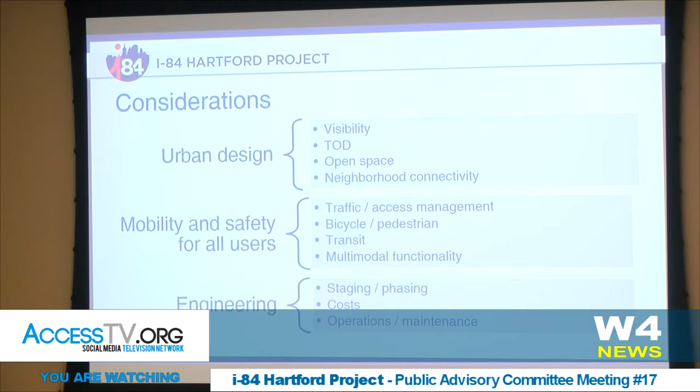So I'm going to invite the panel to come up now - David, Bill, Gina as well. Our panel is David Spillane coming up here from Goody Clancy, he's on the DOT team, our lead urban designer. Bill Kenworthy behind him from HOK is urban designer for the city of Hartford. And then Gina from Trans Systems is the lead transportation planner on the station effort. So David, do we have those mics? David, I'm going to let you explain some of the urban design considerations we've used to evaluate these stations.

So as we're thinking about the station, there were really 4 urban design considerations that we had. The first one really spoke to visibility, that the station was located in a place that was prominent, was visible from major public streets, that really emphasized its importance and significance as an important transportation facility, and had good access for the public. The second was the relationship between the station and transit-oriented development, which will be an important part of rebuilding the urban fabric in the project area that connects the 2 sides of the highway.

The third part really related to open space, and I think this is an important ingredient of what happens in this area, which we've talked relatively little about. It's one of the more likely uses for the land over the highway cap, which has significant constraints or cost implications in terms of building buildings on that cap. So that's a likely use of the capped area. And I think when we think about open space, we shouldn't think about it as being just like a passive park like Bushnell Park, but something that could be far more actively programmed with a variety of uses - maybe active recreation, ball courts, other kinds of things. So it could be a very different kind of open space that also draws people to this area and creates activity around the station.

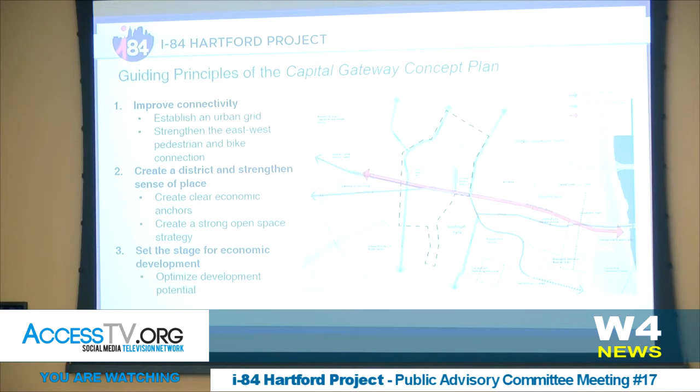We're looking at how you can not just walk, but also bike and use that to get around. We're looking at how you create a district. It's great to have the station and the infrastructure improvements, but how does that really start to grow into a district that connects Asylum Hill and the businesses up there to the downtown core?

Also, how do we leverage the open space that David talked about to really spur economic growth and development? It's great to have office buildings, residents, and apartments, but you really need a place for those people to get out and really interact with the city.

And finally, what this adds up to is helping set the stage for economic development. As I said, it's really taking the transportation investments and leveraging them for the city's benefit and economic development.

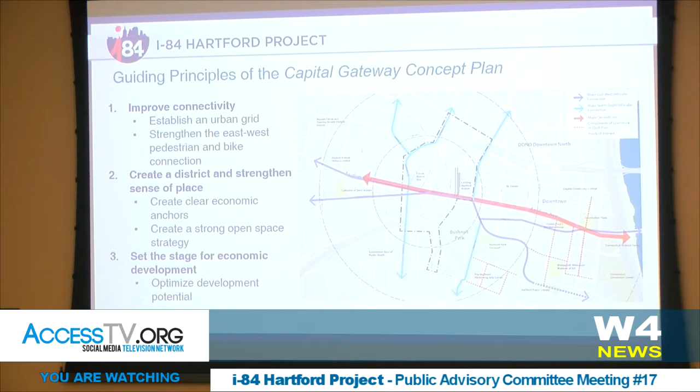Great, thanks John. So I'm just going to take a moment and orient folks to this map here, and I'm going to end up using some version of this as we advance through the different station concepts. So this is existing conditions.

Today the railroad comes underneath these I-84 ramps along Bushnell Park. Here's Union Station, just off Asylum, and then the rail continues to the north under I-84. Here are those two sections of I-84 where westbound goes under Asylum and eastbound goes over Asylum, and then the same thing at Broad Street. And here's Farmington coming into Asylum and Broad Street at the Trident intersection.

So I'm going to flip it forward to show you the lowered highway. The first thing you probably notice is both the highway and the rail shifting dramatically. The rail from Union Station, Bushnell Park, over to the west side of the highway, but also the highway itself, the lowered highway, being reconstructed a little bit, about 200 feet to the west of the existing alignment.

We've also included on this map that Garden Street extension we talked a lot about at the last meeting. Garden Street today comes down here, intersects Asylum at an angle. We're proposing to realign it, cross over the railroad and lowered highway, and intersect Spruce Street.

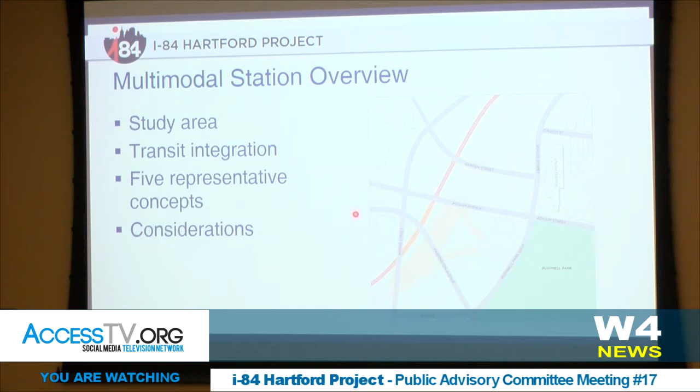We're also illustrating that Farmington extension concept we've discussed previously. I'll get into a little bit more detail on that in the next module, but it is something that we've now adopted as a team. The city's a strong proponent of it, and we're going to illustrate it in this manner on these drawings we're showing for the multimodal station.

You can also see this shaded area here, and that's intended to represent this cap we proposed between Broad Street and Asylum. That would cover both the highway as well as the railroad.

So again, when we talk about our station study area, we're really looking at either north of Asylum or south of Asylum, and that's really how we've grouped these station concepts. We also need to factor in transit and how the transit routes pass through this area.

The first thing I'm going to illustrate is CTfastrak, and again we're going to talk about that later, but generally we're envisioning it entering the corridor similar to how it does today, where it would come in from the west and then follow Bushnell Park West to Asylum Street.

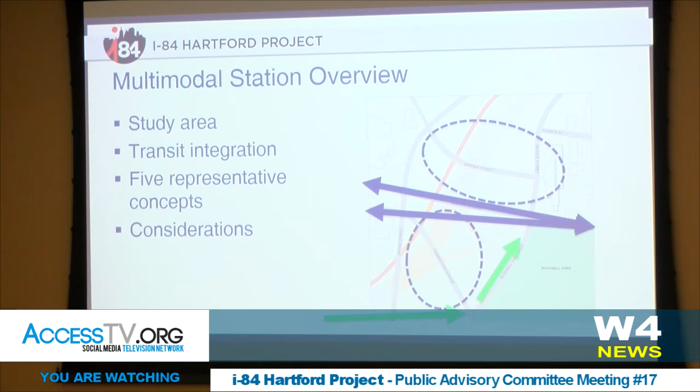There's also very high ridership on local bus routes from west to east, in particular on Farmington Avenue, but also up Asylum, and then there are other routes that go up to the northwest, as well as north-south along Broad Street. So we're going to go through 5 representative concepts, 2 south and 3 on the north, and I'm going to use the panel to touch on those different considerations we explained a couple slides ago.

So our first southern concept, Concept J, is actually one that was recommended by a PAC member and Bill McCarskey as well, who's in attendance today.

It would feature a rail station at the corner of Broad, the Farmington extension, and Asylum, a bus facility located essentially on the highway cap, parallel with Farmington extension, structured parking adjacent to Broad Street between Broad and that Farmington extension on a cap over the highway. And we're illustrating a kiss and ride or drop-off location, which would be accessed off of either Farmington Extension or potentially Broad Street.

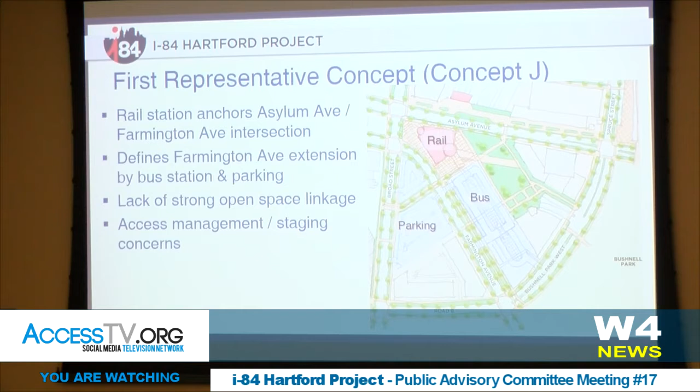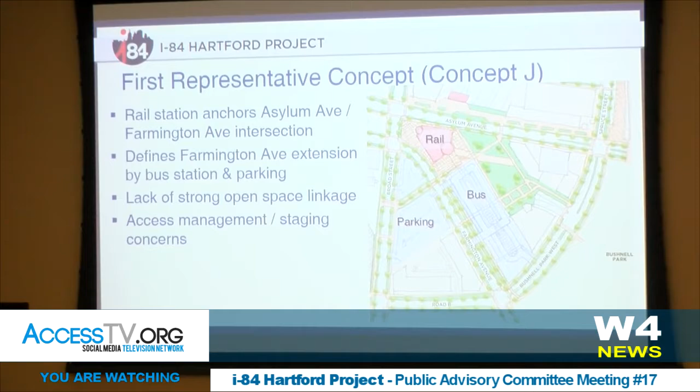Casey calls this the artistic rendering. What I call Casey's drawing is the X-ray, because it's just showing the infrastructure. I think the success of this ultimately is tied to creating a real place over the highway that connects the two sides, made up of the critical pieces of transit infrastructure—the station, the bus station, parking, kiss and ride, and all those other pieces—plus open space, plus urban fabric, buildings with people and activities. So the artistic rendering includes those pieces as well.

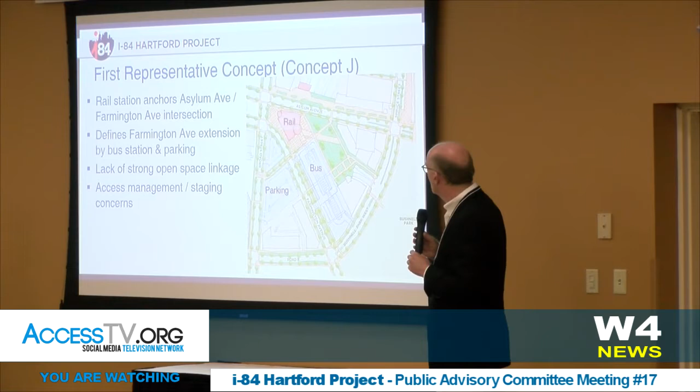So just a couple of observations on this, and I'm going to comment on some of this, and I think Bill's going to comment on pieces of this as well. So what you see here is, as Casey said, the rail station anchors the corner of Asylum and the Farmington extension, and that creates a pretty strong corner. I think it meets the criteria we talked about in terms of good visibility at a very important city intersection.

In terms of open space, in this one we're showing open space adjacent to the building. Probably not the best location for it, as it's not well connected to many of the things around it, so that might not get quite the level of use or activity we might hope for.

Asylum Avenue in this one, I think, works really nicely. What we've got on the north side are new buildings. The station becomes an important part of the street, and all of the kiss and ride and other access functions are really pulled off onto some of the other streets. So Asylum works pretty well.

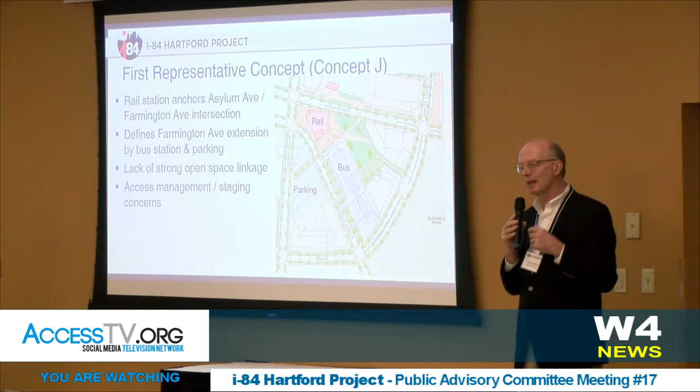Concerns from me on this one, from an urban design perspective, would be that Farmington Avenue extension, because what we get on that street is a street that at the corner with Asylum has the rail station, but then you've got the bus station behind that, and we've got parking on the other side of the street. So on the Farmington extension, where I think the vision and ambition is that it's a gracious street that extends the Farmington corridor into the heart of downtown, I think a lot of the things in this option that are on that street are really sort of support infrastructure. If you can imagine Spruce today, a lot of those activities in this version are coming onto Farmington.

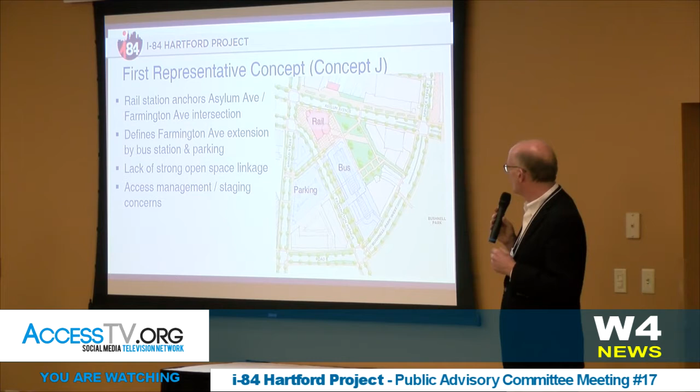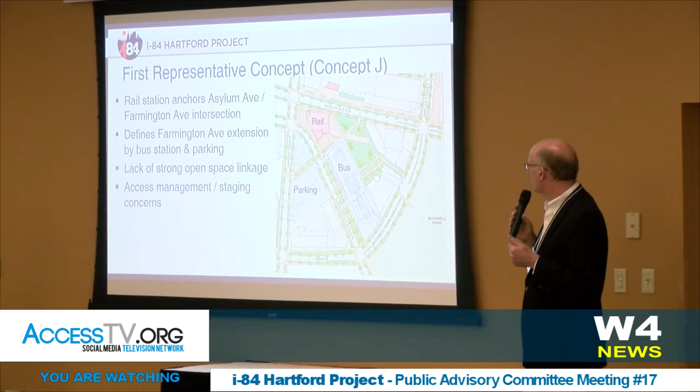In a similar way, I think that Broad, which is such an important connection across the corridor, becomes a street that's really defined by largely a parking structure, kiss and ride, and other things. So ultimately what we get here is not a great street on Broad, not a great street on Farmington. Asylum works really well.

Thanks, David. Gina, can you tell us a little bit how you see this working from a transit perspective?

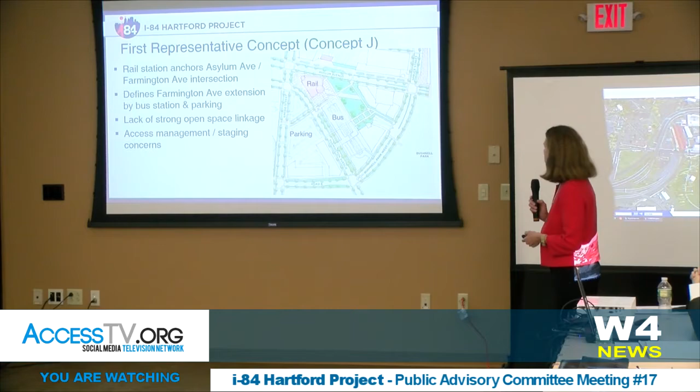From a transit perspective, this would actually work well because in some parts the rail and bus are in proximity to each other. You would just be crossing at grade to get from one facility to the other, with bus passengers also using the rail station for waiting area, vendor space, and crossing to the parking lot, also done at grade.

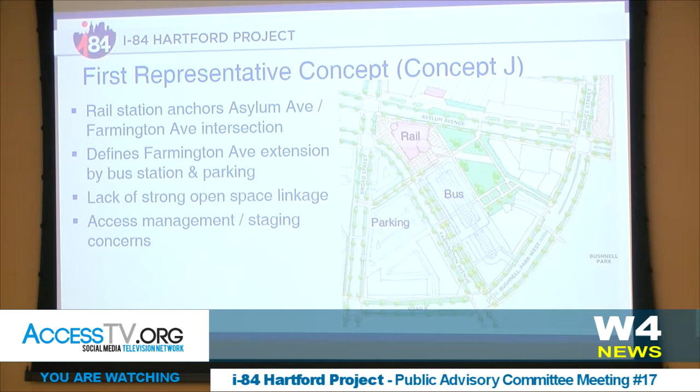To get on the north side of Asylum, which you may want to do to catch a local bus on the north side of the street, we could possibly build a concourse level below the at-grade level to make some connections. From a passenger loading perspective, the two south options have some drawbacks because the station is on the south end of the platform, meaning passengers would be loading on one end rather than distributing among the platform.

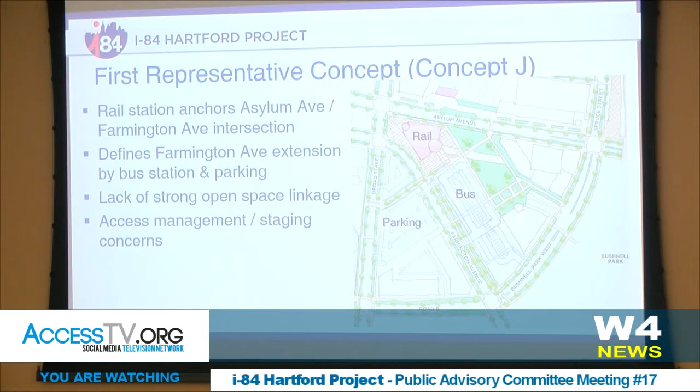Thank you, Gina. And Bill, from your perspective, what are you seeing with Concept J?

From an economic development standpoint, we began looking at some of the key sites on Spruce and Asylum, down lower on the south side of Asylum, and Bushnell Park West, and one down here on Road B. An opportunity here really isn't an opportunity in this plan because of the location of the bus infrastructure, so those are some things to consider. The great addresses could be on Spruce and Bushnell Park West, facing the park, in terms of how we get active frontages on those streets and the surrounding open spaces. We'll touch on those criteria as we walk through each version.

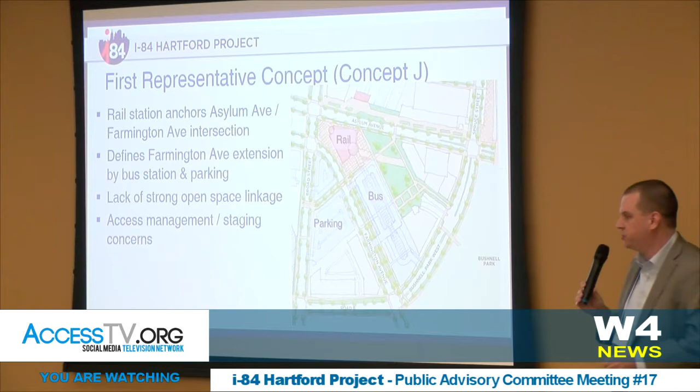The last concern we see with locating these facilities south of Asylum is that access for both parking and buses is off one of the major streets—it would have to be off Broad, Farmington, or even Asylum—and that's something we'd like to avoid.

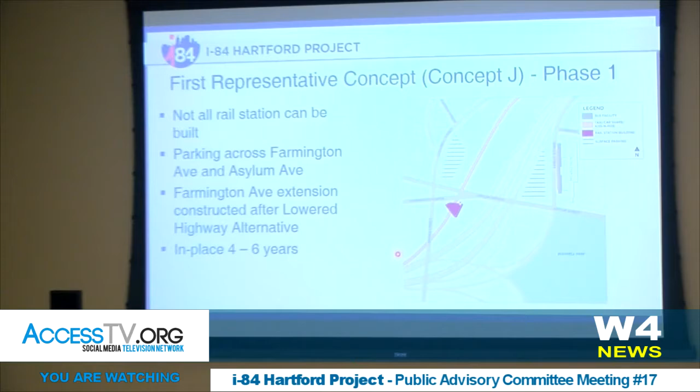There are also some staging or phasing concerns. Let me bring up a map to illustrate. This is what we're calling phase one, where we've relocated the railroad but the existing highway network and ramps are still in the same locations. Ultimately, the Farmington extension can't be built all the way to the end of the project after we've already lowered the highway, so we'd be in a condition where we'd need a temporary station, and it'd be really difficult to provide any parking for it.

I know that's probably an unpopular take, but we do need to provide some parking. The only opportunity we see is to use this lot currently owned by the Hartford, which we'd need to acquire to construct the railroad, and use it to provide temporary parking—temporary really meaning 4 to 6 years.

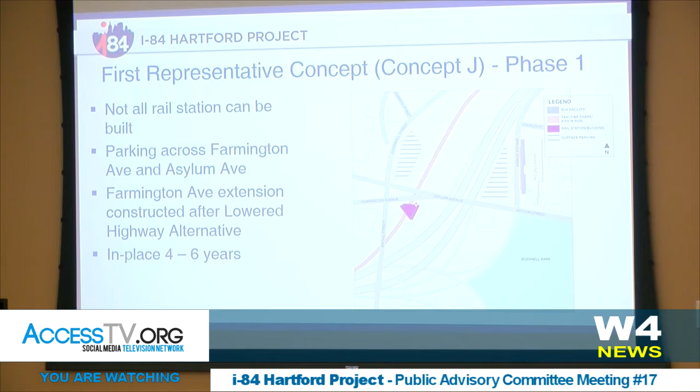So this is a downside to the southern option, how it would function in this first interim phase, and the same applies to our second southern concept, Concept K. Here the rail station stays in the same location between Farmington Extension, Asylum, and Broad. The bus facility and a parking structure would be combined in one building along Broad, mostly on a cap over the highway. We have a couple ideas for where a kiss and ride or drop-off could go—one is as illustrated here, and on the next rendering you'll see it could also be here.

So I'm going to start with Bill on this one. Bill, do you want to talk about some of the urban design and development aspects?

Sure. So on this one, the rail station is obviously still to the south, and the kiss and ride is here on Farmington. In this concept, we've relocated the bus parking along Broad Street, which allows the center of this block to be opened up for open space with development surrounding it, as I mentioned in the previous slide.

Some of the considerations here are the relationship of bus parking against Broad Street and Frog Hollow, which is a kind of drawback to this particular scheme. But what this really does is begin to open up the center of the plan and allow more of the amenity spaces associated with the buildings to become part of the experience with the open space as well.

Thanks, Bill. Gina: for this concept, the rail and bus are a little bit too far apart to allow the rail station to function as the bus station also. So in this case, you'd almost need to build a separate bus waiting area just north of the bus parking, or even south of it. From that perspective, it's not as ideal as the previous concept.

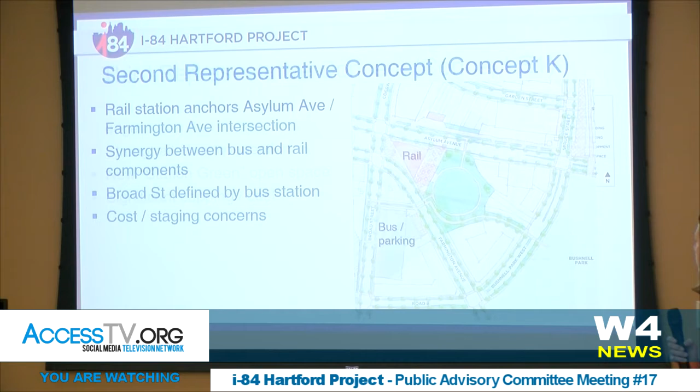So now I'm going to move to a northern concept, concept E1. We're going to show basically 3 different versions of concept E, and the differences are really in where we locate the bus and the parking facilities.

The rail station is on the north side of Asylum, constructed over the tracks between Asylum and Garden, and we envision it would have a facade on both streets. In particular we would pay attention to that Asylum facade in terms of pedestrian access.

The bus and parking facility would be located on a cap north of Garden Street. This is a change from other concepts and previously illustrated cap options, where we're now having a cap that extends well to the north of Garden Street.

We've illustrated a kiss and ride here on this drawing. It could also be a little bit more linear along Garden Street, but generally speaking, we're thinking it would be accessed from Garden Street.

So I'm going to start with David on this one, if you want to touch on some of the urban design aspects here. So, you know, this one, we have the rail station here on Asylum, coming out to the edge of the street.

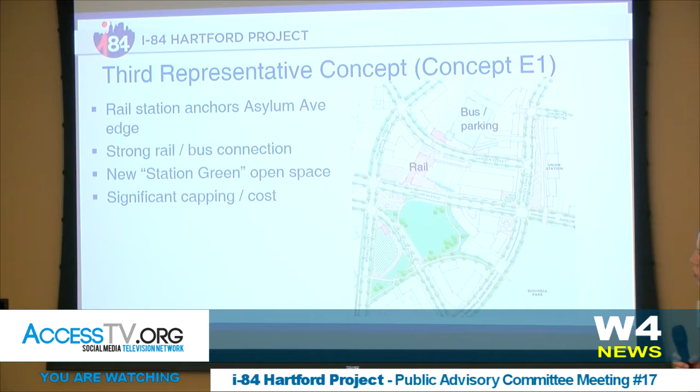And I think that we've studied views up and down Asylum, and if you go right back up Asylum, a building that came out to the edge of the street, if the building beside it was slightly set back, really could terminate a long vista along Asylum, just as the Congregational Church does at the other end.

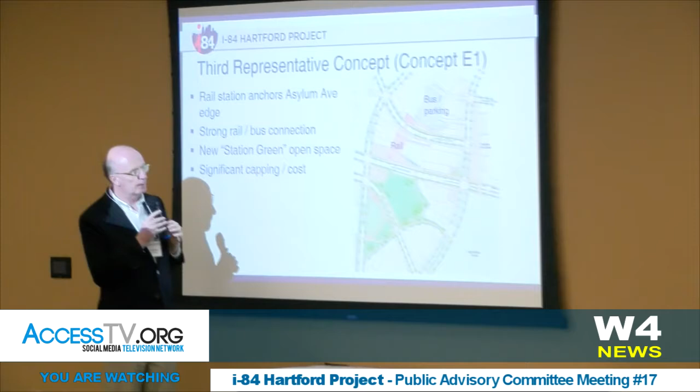So in terms of visibility, I think we've got some strong visibility here. In this case, Asylum and Farmington are really terminating in an open space, which, as I said, might not be an open space like Bushnell Park.

It could accommodate active recreation. It could even potentially have some lower buildings, pavilions that activated the park. But this, in effect, becomes the station square as a space that's shared between commuters, surrounding neighborhoods, and the corporate communities that are here, and becomes a gateway from the downtown to the neighborhoods and vice versa.

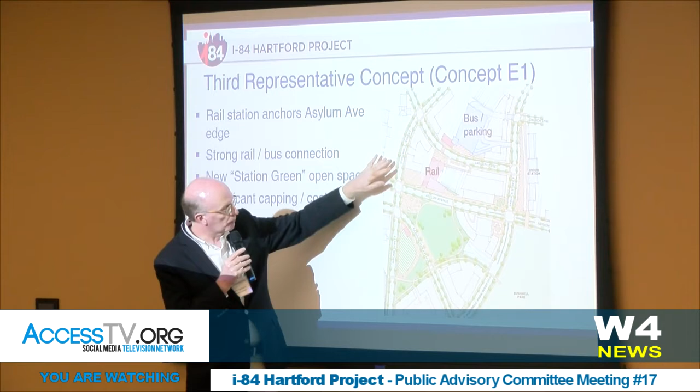Looking at the streets, I think one of the things we get is a nice transition along Cogswell to Broad, which is really a connection along the edge of a park. Farmington, again, connects through a park space as a gracious street, as is Asylum.

In this case, most of the functions for the bus and rail station drop-off pickup are on Garden, but just because of the configuration of the street, we're able to include them in a more compact way than we were on this much longer Farmington connection. So in this case, I think there's a pretty good relationship between development and open space and the train station in ways that each reinforces the other.

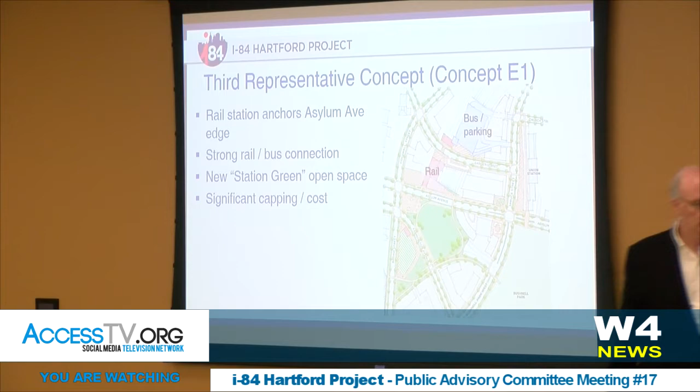Thanks, David. Gina, do you want to touch on the transit? From my perspective, E1 really works well from a multimodal connectivity practice. Rail and bus are relatively in close proximity.

You could either cross at grade on Garden, or you could possibly build a concourse level. Again, the platform level is lower level. You could have a concourse in between the at-grade and the platform level to have some connections on that concourse level between the bus and the parking.

The drawback here, though, is it does require a cap. The cap is very costly, and we also don't have a really good read on whether there are security or safety concerns building over a highway. So those are considerations we are still thinking about, but the cost implications render this one maybe not as feasible as we would like.

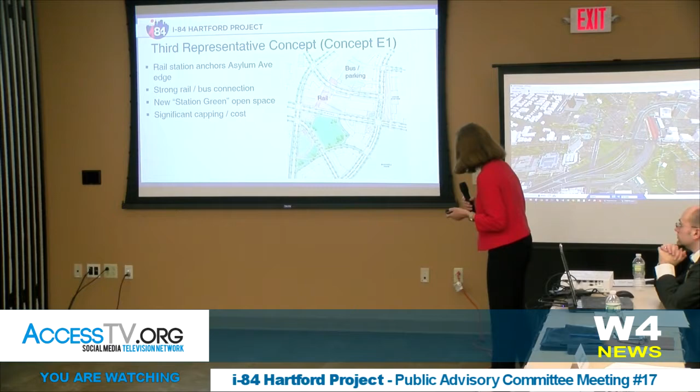In terms of the phasing, we actually see the northern functioning a little bit better during phase 1, where the rail station would fit in nicely with where we are able to provide that parking access, further up off Cogswell Street, taking some of the burden off the Trident area. So we do see that working better.

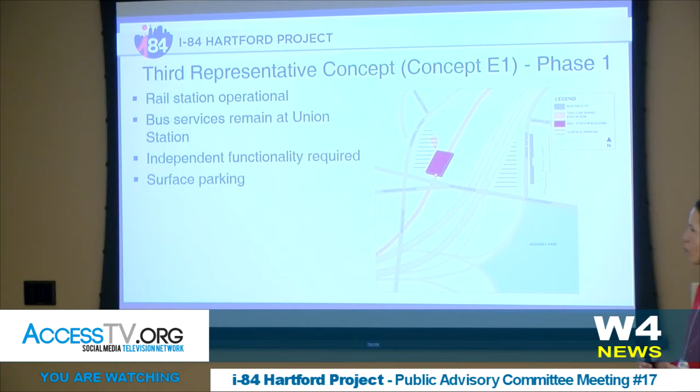And just to confirm for everybody, the bus activity would likely remain at Union Station until the bus facility would be constructed, which for each of these concepts ends up being late in the construction process.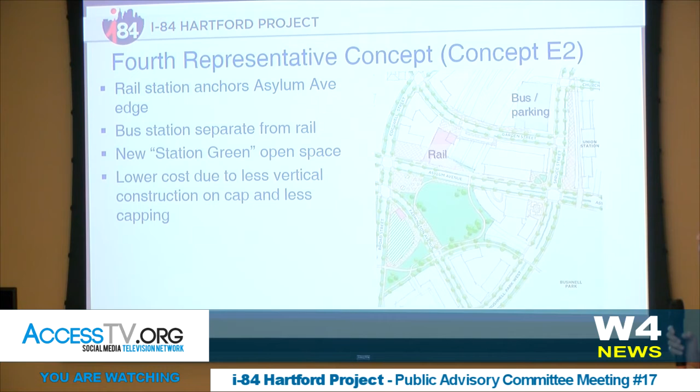Well, in this concept, the bus is really acting similar to what it would be doing now in terms of being very proximate to Union Station. However, from best practices or what we've heard from the public, we really feel that the bus and rail should be pulled as close together as possible. So for this concept, it would not really support that multimodal functionality.

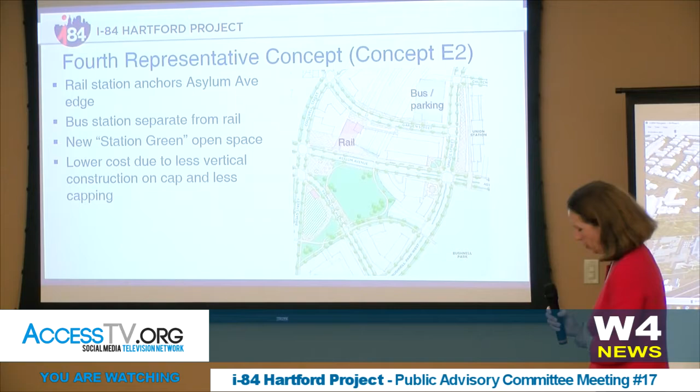Thanks. Bill, do you want to? Sure. So the big difference for the economic development in the streetscape is you're obviously taking what was a developable frontage across from what the repurposed Union Station could be, and relocating the bus station to that area. Now, that doesn't mean there couldn't be active things happening near the ground floor to keep that experience of a higher quality, but it's just something to consider in terms of what's fronting on what the repurposed Union Station might be going forward in the future.

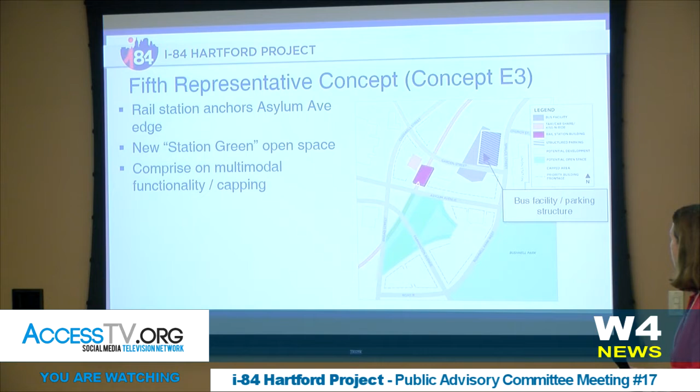Thanks, Bill. So ultimately, what we then tried to do is take those two concept E's and try to balance the cost implications, the need for capping, and also try to create a little bit better multimodal functionality. So the way we did that was we took our E2, which has the bus facility located in this parcel next to Spruce and Garden, but we've now shifted the bus closer to the rail station by bringing it underneath Garden Street. So this is below Garden Street, essentially constructed where that parking lot is today for Union Station. We would excavate a little bit down to allow Garden Street to come over. And again, the same general concept for the kiss and ride.

Gina, do you want to talk a little bit about how this actually affects multimodal? This is a pretty good compromise, especially if there is a cap, which will be shown in the next slide, between Asylum and Garden, and we can talk about that in a little bit. But this at least brings the bus and the rail closer together. It lowers the bus facility to below grade, but yet has access off of Spruce Street because of the hills and the grade. So the buses can operate pretty efficiently coming in and out of the bus facility, as well as the parking vehicles for the parking lot.

It does provide connectivity between the rail and bus that we could actually have as climate controlled. You see that blue, that would be representing some type of pedestrian walkway between the bus and the rail. And you could bring passengers from the rail to the bus facility through an underground tunnel possibly, or some type of concourse also. So there would be some connectivity.

Thanks, Gina. David, do you want to touch on some of your thoughts? Yeah, I think this one is really very similar to the one that Bill previously described. I think the real difference is only the ability to get passengers between the bus and rail functions internally, without going out on the streets. That's the primary difference. From an urban design perspective, I think they are essentially the same.

Thanks, David. So I'm going to advance one more, and Gina had referenced this idea of potentially capping this area between Garden and Asylum, and it is something the city's expressed a real interest in. So I'll let Bill give his thoughts here on this image.

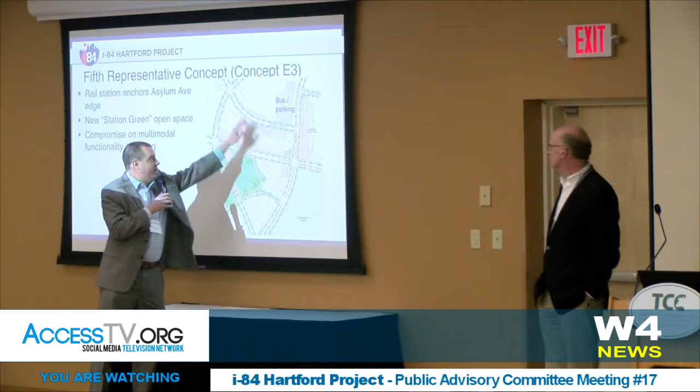Sure, and the concern and consideration is the relationship of this open space to the new train station, as well as the development that sits across from it, and the experience walking down Garden Street, and making sure that whatever happens in here doesn't feel like it's a hole in the ground with a lot of noise coming out of it. So the goal here would be not necessarily in an intensively planted way, but maybe there's a way to get a structure that can still be active.

I'm still concerned about the size, and I think David shares my concern about the size of this space. This is about an acre worth of space over the highway, 200 by 200. But to create an opportunity to be a new open space heart in what could be a new commercial district related to the rail station, and to provide mitigation against what otherwise would be an opening down into the highway for the purposes of development happening north of Asylum.

Thanks, Bill. So ultimately, I think the conclusion here is based on a lot of those different factors we explained that generally favored the northern sites. We've then worked to create this concept E3 that we feel best represents a compromise in terms of potential construction costs versus multimodal functionality, and we're here today to recommend this concept. So to wrap that up, we feel that E3 best satisfies the criteria, has all those advantages shared with the northern concepts, and has that balance.

We're hoping that the next steps from here would be to advance the design of that station to what we call about a 15% architectural level, which we'd wrap up right about when the EIS process concludes. So we did want to pause for Q&A here. If one of you guys could be a runner for the microphone if we need one.

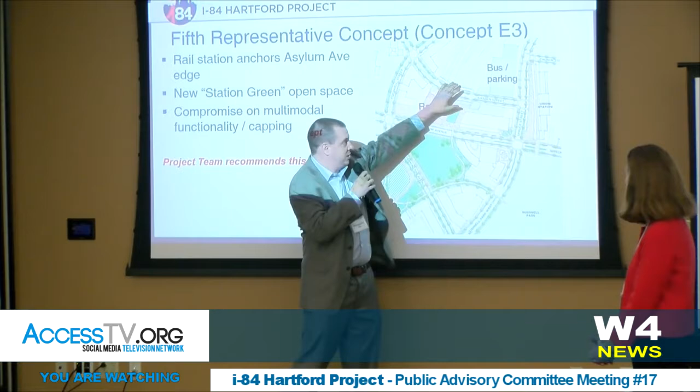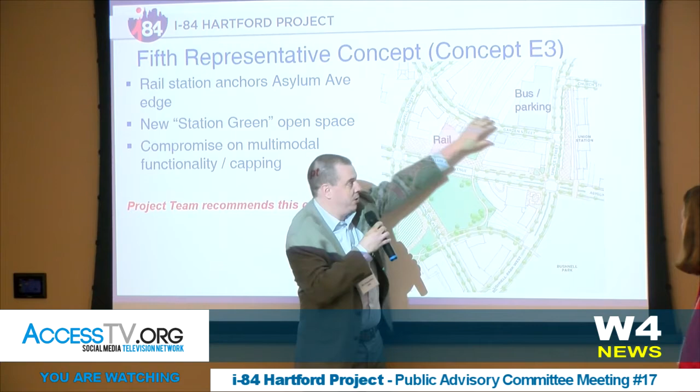I think the hope of Garden Street is that it's an important pedestrian connection from Asylum Hill down through the new district we're creating to the repurposed Union Station. And the idea is that it's a pedestrian bike street that happens to have vehicular access into the station, and that this is going to look and feel like a city street. There are some frontages that are a little tougher with the bus station. And the idea would be we would try to activate those frontages to the degree we can at the ground floors, which is the most critical part, to make sure that you have as seamless an experience as you can coming down through here, that's the goal.

And to Tony's point about open space, I'm the biggest advocate in the room for making sure we manage, control and have properly scaled open space. So there's certainly some concerns about being able to fit a Bryant Park-sized facility within this green space, and I don't know that it has to be as green as we're showing either. I think it's about creating a great program that's seasonal, that allows it to be active a lot of the year. I don't want to create another Bushnell Park because you've got a great Metropolitan Park right on the other side of this development. This open space wants to be a different kind of setting, more courtyard-like, maybe harder paved than green. Not that you can't have trees, but the idea is it's got more different types of uses happening, helping it be an active space year-round, 12 months of the year.

Yeah, I completely agree with that. And I think in terms of open space, where we would be is at the beginning of the conversation about how to really make that something valuable. I think Providence went through a similar process with similar circumstances when they created WaterPlace Park, as part of a major new development as they moved rivers and highways, adjacent to large areas of open space and parkland around the state capitol building as well. So I think it will take a lot of work going forward to fully define that.

I think there are possibly interesting connections from the YMCA there in terms of programs. I think it's a place we could think about playgrounds, bowl courts, all kinds of other things that really made this a valuable community space, used very differently from Bushnell Park, but it will require significantly more attention going forward. I think there are really great opportunities there.

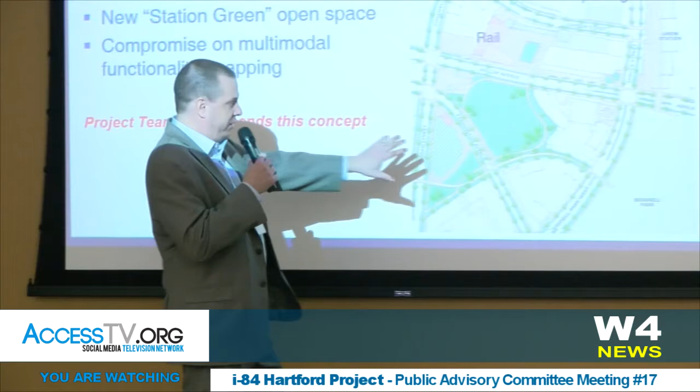There's one more important point about the size of that open space. A lot of it's dictated by the highway infrastructure or train infrastructure that sits underneath. It's very difficult to build buildings on top of. So in designing this, we need to think about the right things to do to make that space more manageable in terms of size, scale, and character. But it's better than having a hole down into the highway, which would be the alternative, because otherwise you're going to build something like heaven over I-84, basically a building site that never happened, which would be the end result otherwise. So we need to make sure we get that right and program it correctly for the long term. Aaron had his hand up first.

Well, Bill just took my first thought. I would definitely agree. I think it's been generally accepted in the room that private development is not going to occur over the highway because of the additional cost of the increase in size and the cap itself. So I strongly agree it would be much better to have green space capped on top of the highway and hide the impact through this stretch than anything else. Most in this room know that's what I've been pushing for from day one on this project. So that being said, I am encouraged, as I've said many times, to see the cap along this section and to see the green space there.

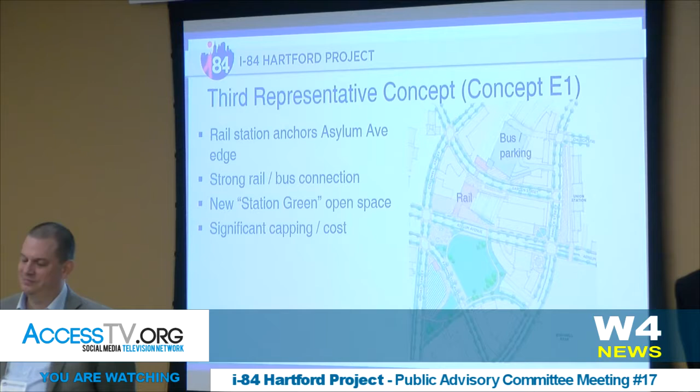Along those lines, knowing we're not going to get private development on top of the structure, I would strongly encourage reconsideration of concept E1. One of the main goals of this project has been explained to me as reducing traffic congestion through this area. One of the most cost-effective ways to reduce vehicle congestion on highways is to get people into public transportation. And it was pointed out the best way to get people using public transportation is to make it easy and convenient. Separating the bus and the rail - on this drawing it doesn't seem like a long distance, but I know many will use that as an excuse - whereas E1 really pulls together the bus and the rail use. Many in my neighborhood will use the bus as the beginning and end of their commute, taking the bus to the train station and the train to work, then doing the opposite. So I would encourage reconsidering the concept of E1, recognizing there are other cost benefits to putting those structures together.

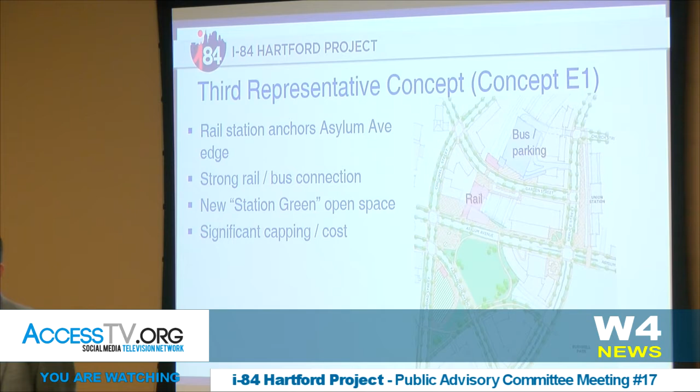I also am discouraged about E3 by the fact that we're eating up yet another prime piece of real estate in the heart of downtown with the use of a parking garage, whereas a parking garage over the highway is a great use of that space that would otherwise be wasted.

Thanks, Aaron. I just wanted to confirm one thing on the bus access to the station.

So while we label this as the bus facility, that's really primarily an intercity bus facility, your Greyhounds, your Peter Pans. I'll talk more about CTfastrak later, but we envision that local bus routes on Farmington and Asylum, and potentially CTfastrak routes, would still have stops right in the vicinity of the train station. So if you were taking a local bus to the train station, it wouldn't necessarily take you to this bus facility.

I kind of agree with Aaron as far as E1 is concerned. And I like the idea of the green space. I think Bill McCarskey, from even before this project began, has talked about the view from the little girl and the hands across to the state capitol. This green space makes sure that nothing obstructive is going to be there.

If you do E3, could you talk more about the tunnel? Because I would be fearful that it would turn out to be a narrow, scary, unattractive, hard to keep clean space. What do you think you might do to make it beautiful, appealing, and comfortable to walk through?

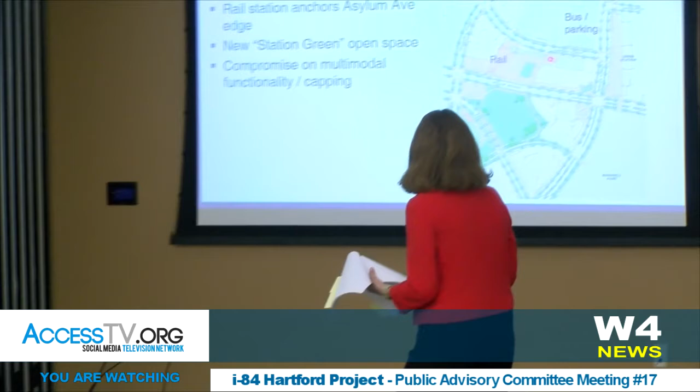So I think you're referring to this potential passageway underneath Garden Street, between the rail and the bus. Oh, so that would not be a tunnel. Yeah, that would not be a tunnel, what we're showing there. I had mentioned there could be a concourse connection, a tunnel type connection also below the at-grade. What we're showing there is an at-grade crossing, just climate controlled. It could be part of a building, it could be part of a glass enclosed structure, or actually just a walkway with a covering. We just want some type of climate controlled facility connecting the rail and the bus.

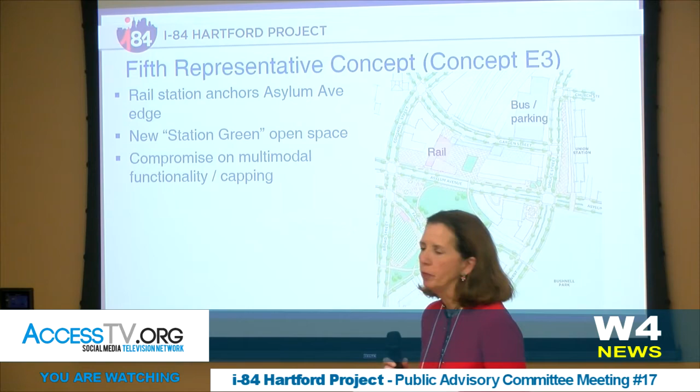There are also other options to connect if you wanted to go below grade and make a connection there, but I understand your concerns with having something that's not secure. And to the issues you raised, it's a walk uphill from that bus station. So in January you want a place with climate control, but Garden should still be a great street, so in the summertime you can walk up and down the hill.

Thank you for your patience, it always takes me a while to get these. Can you explain a little more about which buses are going to be at the bus facility? And is Spruce Street going to be widened? And where are the city buses going to be?

The only routes pulling into the facility would be the same routes that pull into Union Station today. There are 5 local bus routes that end at Union Station, and those are the 5 we're assuming would pull into the new facility. The bus routes that continue on Asylum and Farmington would still be routed the same way, so you would make connections on the street. If they go down Spruce Street now, they would again. Correct. Any buses that don't currently pull into Union Station, I have those numbers and can share them with you afterwards.

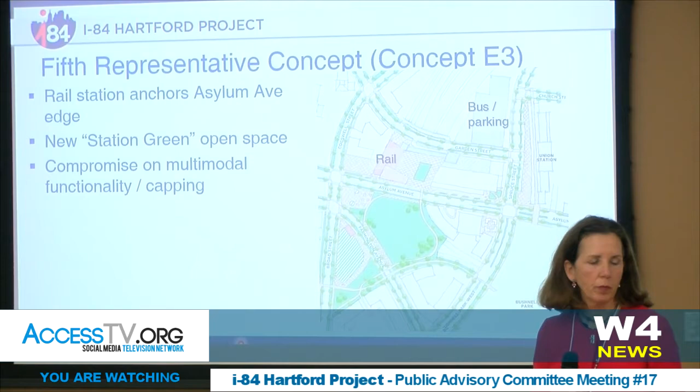But is Spruce Street going to be widened? I'm not aware of Spruce Street being widened, I'd have to check. We did consider whether there might be a need for a turn lane to serve Garden Street, but I don't know if that's fully resolved. Just remember, there are no lane lines on these diagrams. There's more engineering that goes into the intersection design. This is really just a conceptual view of the overall area. We have other drawings with more detail for some of the lanes.

Okay, because I was just, there are sometimes a lot of buses at the same time in the same place. Last week, between Union and as far up the hill, I could see there were 17 buses. A lot of those are probably intercity buses. There's Intercity, Peter Pan, CTfastrak, and the week before that I was on Spruce Street making the turn onto Church Street with 6 buses. So they take up a lot of room and they really don't make it easy.

Well, the intercity buses would definitely be pulling into the facility, and the 5 local buses would be pulling into the facility too, so they wouldn't be staged on Spruce Street as you see them now—they're on Union now. Right, so they'd be pulling in off the street into the facility. Would that be the end of the route, or would they still go downtown? If they end at Union Station now and turn around, then they would; if not, they'd continue their normal routing, but pull into the station to keep going. Only the 5 that currently do now.

Is that the ones on Union Place? Correct, yeah, so I can give you those numbers. Those buses go downtown, then terminate at Union Station—perfect buses to come into this bus facility, because they're already taking their layover at Union Station. Those are the only ones we're talking about that would pull in. When they start their return trip, they hit downtown, then go out together, whatever their schedule is. The transit operations will be relooked at once this facility is being designed.

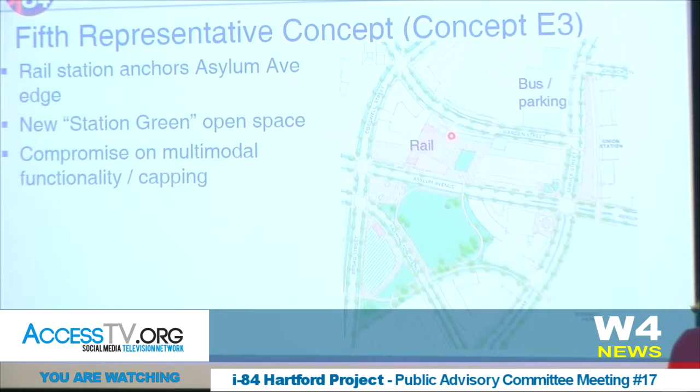I just remembered my other question, about the connection between the rail and the bus. If it's going to be an uphill grade, is that okay for wheelchair or handicap access? It would be relatively flat, about 3%. Garden Street isn't that steep—it doesn't really start to descend more steeply until after it crosses over the highway, so this part isn't actually as steep.

There are examples of how to create active frontages, office spaces, retail at the ground floor of garage structures, so I would think that's possible. I think it has to be worked through with the team going forward to make sure when the location is set that we have that as a performance criteria.

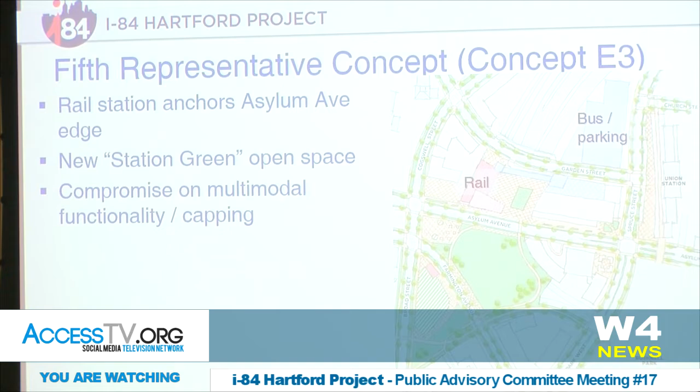So we've got some last questions. What's going to be on Garden Street to make it pedestrian friendly? We have not identified the full range of bicyclist and pedestrian accommodations. I would imagine it would include widened sidewalks, potentially bike lanes, and some street furniture, whether that's street trees or other types of amenities.

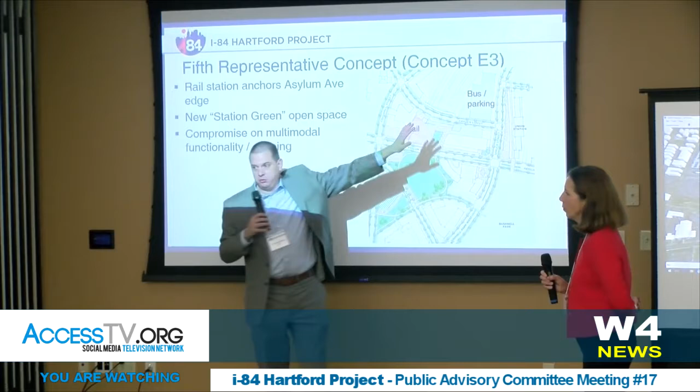The hope is that development sites fronting on it would have active frontage as well, so this isn't a back street—we want it to be a city street, as complete a street as we can make for that access point coming down Asylum Hill to the new repurposed Union Station. It's a very important front door for Union Station from this side, the way it's considered now. Yes, exactly.

So I think what I heard was a couple folks mentioned E1. Maybe what we can propose is to advance these two northern concepts, and get back to you on what exactly that cost difference is. We're still finalizing those cost estimates, but we think it could end up being a big number, which shapes part of our thinking in recommending E3. But I didn't really hear any opposition to moving forward with a northern concept.

I just had one last one—I just stole the microphone. I wanted to second the concept E1 and getting that bus and parking over the cap. I see that as good use of the cap and a better use of developable land that we could keep free. Thanks, Tony—so we'll pull forward both of those two concepts and get back to you on some of the cost differences.

Is the cap next to the rail in E3 included? As I heard you say, it would be a great spot for a cap next to the rail, with the green rectangle in it. Is that part of E3, or just a possibility? I would say it's a possibility being strongly recommended by the city, as we conduct cost estimates for the two different scenarios, and I think it will have to be part of the conversation moving forward.

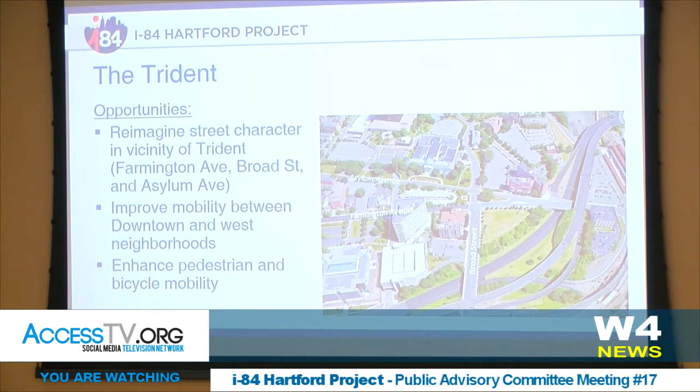As you all know, today it does not operate well, and with the potential changes in travel patterns - today one of the big drivers for travel patterns in the Trident is access, particularly in the PM, to this eastbound on-ramp that comes from Broad Street. Ultimately, in the lowered highway alternative, that would be moved to that new road off the page here, Road A, Bushnell Park West. So that does make the general travel patterns for people traversing the Trident change.

We'd also like to ensure that not only does it operate well for vehicles, but that it needs to be a better bicyclist pedestrian corridor. And David Spillane, going back to the hub study, has always talked about the importance of bridging from Asylum Hill down to downtown with a strong pedestrian connection.

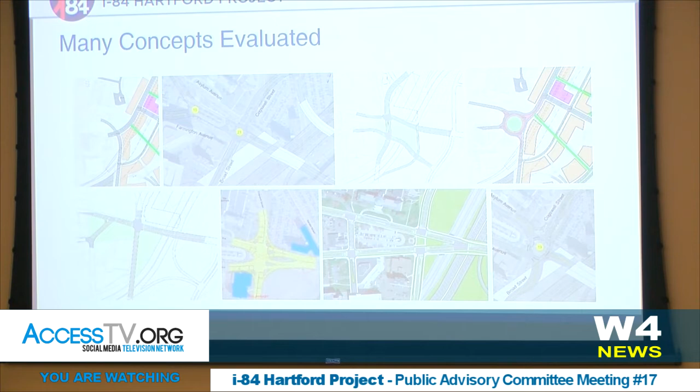So we've looked at a ton of concepts, literally. We talked a lot about that crazy octopus-like roundabout at the last meeting, and at that November PAC meeting we went through these 4 concepts, including that roundabout. I think we all concluded at the time that roundabout was just not going to work - the complexity, the number of lanes, poor pedestrian environment. So we have taken that one off the table.

We also had that western shift alternative that would have moved the intersection of Farmington and Asylum about a block to the west. Ultimately that would have impacted the DAS parking garage. As we're weighing these alternatives under NEPA, an extra building impact for one alternative ultimately couldn't be justified, so we've removed the western shift, which leaves us with our Farmington extension and the discontinuous Broad Street of the 4 concepts we presented last time.

Just to touch on the discontinuous Broad concept, this is the idea to cut off Broad Street for vehicles between Farmington and Asylum. There would still be a bicyclist and pedestrian connection through there. That would allow these three intersections to operate far more effectively and potentially allow us to have fewer travel lanes and help create a better bicyclist pedestrian environment.

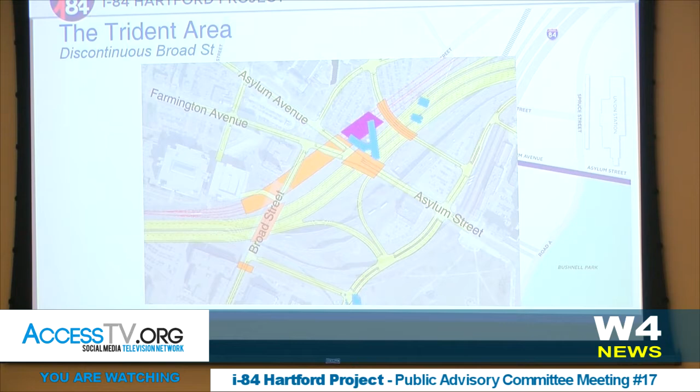However, we do understand, and the feedback we've gotten has been very strong about the desire to keep Broad Street as a through movement. So with that in mind, we have kept this Farmington Avenue extension, which has been championed by the city and their consultant team. As this is a city street, we've been happy to adopt this. You saw it illustrated on those multimodal station graphics. It does keep Broad Street open.

We are continuing to analyze the potential traffic operations. As a result of keeping Broad Street open, these intersections are still fairly complex from a signalization perspective, requiring quite a few travel lanes. So we are a little concerned about the bicyclist pedestrian character of these roadways, particularly with a proposed multimodal station located right off Asylum. In addition, we've been looking at Farmington Avenue and whether we can provide the bicyclist accommodations we'd like to, given the width of the street and some of these potential impacts. But either way, we are continuing to look at these two options as we move forward.

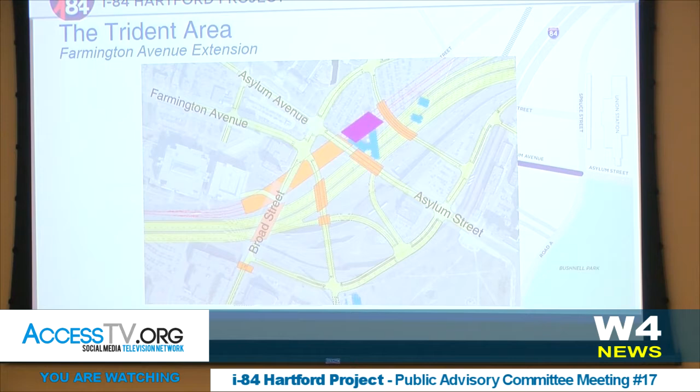We could potentially evaluate both options in the DEIS. So just to wrap that part up, we've adopted the Farmington extension, continuing to analyze both of these two concepts, and we envision a potential level 3 screening document that could filter out these Trident concepts prior to the DEIS.

Jackie: At night, when the Civic Center and the XL Center let out, when all the clubs close, can you back up one? There's a lot of traffic that goes up Asylum Hill.

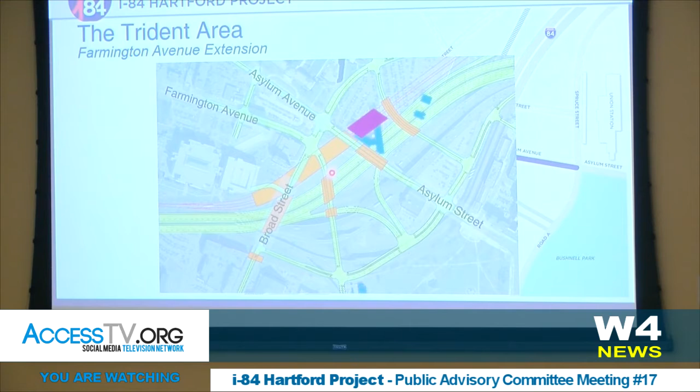I'm assuming they're going Farmington, Asylum Avenue. So with the new Farmington Avenue extension, a lot of that traffic would take a left on Bushnell Park West to get to Asylum Avenue. I tend to think they'd come a little bit further up the hill — from a travel distance perspective it'd be a little shorter. Late at night you'd probably use Broad Street since there's not a lot of traffic; it'd be relatively easy to make a left, and even if you had to, you're right on red. During peak conditions, it might be more likely to see people come up to Asylum Place — that would be a little bit shorter as well. But yeah, coming down Bushnell Park West would also be an option, although it would be the longest of those three scenarios.

But you bring up a good question. One of the things we're continuing to evaluate with this Farmington extension is how it fits travel patterns, and that's something we haven't fully concluded on yet, but certainly something we're still working on.

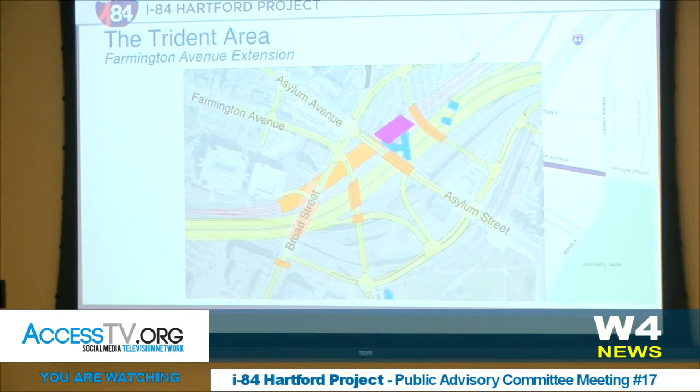Tony: Wants to go on Asylum Street and will be coming back out of Asylum Street. With this Farmington Avenue extension, you're actually reinforcing another route to downtown, which is also used a lot — Capitol Avenue, particularly when the Bushnell lets out. I don't see why you wouldn't go right up Capitol Avenue to do the Farmington Avenue extension, if you wanted to go out Farmington Avenue, or you could go over to Asylum. But I think it's a mistake to assume that all the exiting downtown traffic is coming out of Asylum.

Sure, that's a fair question, and we do recognize the potential new travel route this offers, and we're certainly continuing to weigh that. I think we are continuing to evaluate those travel patterns. I don't think we've really locked anything in there yet.

Tony: Just in general, I like seeing new connections because it does give options during both peak travel times and other times. So any of the proposals for the Trident seem to be giving more options rather than less for how folks can get from one place to another in that area.

Thanks for your comment, that's true. Okay, I will move along to CTfastrak.

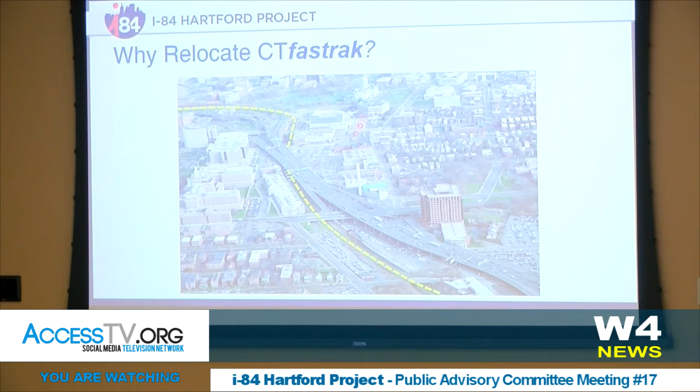So you may be asking, why are we talking about CTfastrak? For the same reason we talk about relocating the railroad, because CTfastrak follows that same corridor, crossing beneath the highway. Here you're looking at a view looking east, with the Capitol and Bushnell Park. This yellow line denotes the railroad corridor, but CTfastrak parallels that all the way to Asylum.

So I'm going to go to a plan view map of existing conditions. Today, CTfastrak's guideway comes in from the Parkville station, has its Sigourney Street station, crosses at that skew underneath I-84, and really the guideway terminates at Asylum.

Early on in the process, we presented a concept for reconfiguring CTfastrak in conjunction with the lowered highway. Unlike the railroad, where we've eliminated the crossing, we'd still like to see CTfastrak cross the highway and rail corridors to get folks toward the CBD. So this concept was presented a while ago.

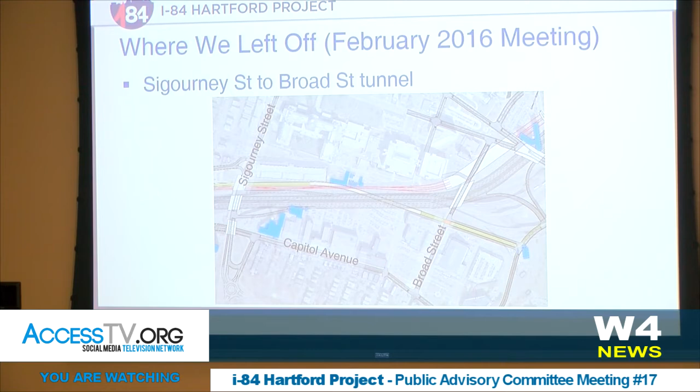I'm going to zoom in on the area near Sigourney Street to illustrate how we envision that crossing. Here's Sigourney Street, the gray is the lowered highway alternative, and here's Broad Street. The guideway would come in at the Sigourney Street station, start to descend and be in a tunnel section beneath the railroad and the highway, then come up around underneath Broad Street, climbing the grade, and terminate at Bushnell Park West Road where it would traverse up towards Asylum. This was essentially our favorite concept early on in the process.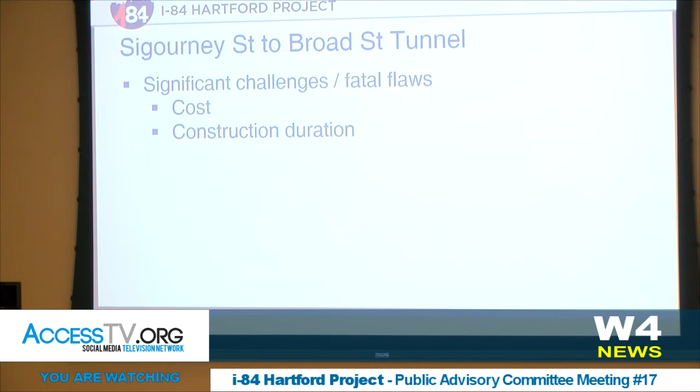About a year and a half ago, we conducted a cost estimate, and we estimated about $390 million prior to escalation and contingency. It would take about 4.5 years to construct — very complex construction, building this basically underneath the existing viaduct while trying to keep it in place. So CT Fast Track would be out of service for that extended period of time.

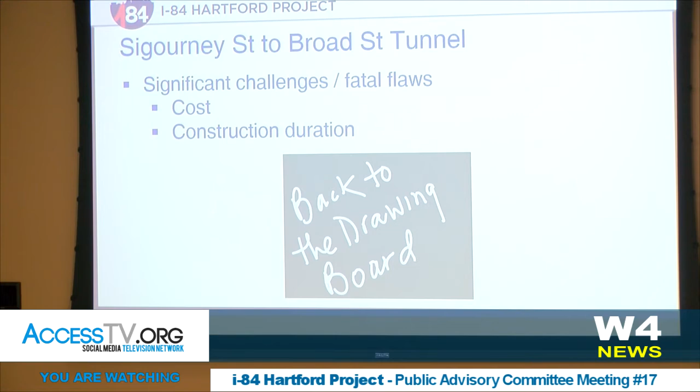So we've been back to the drawing board, and that's why we haven't really presented something to you until today, where we feel like we've answered a lot of the questions on that. We developed many different ideas.

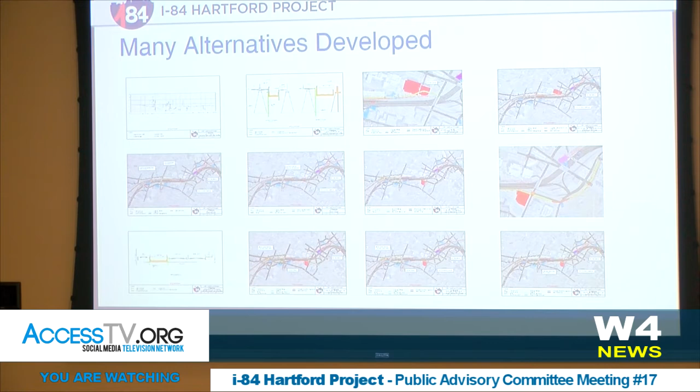We've now looked at 9 complete alternatives with many sub-alternatives. As we've evaluated those, we've considered their ability to let CT Fast Track access the central business district. There are two CT Fast Track routes whose primary purpose is to get downtown, and other circulator routes using local streets. We'd like to allow CT Fast Track to meet its service goals, both permanently and temporarily during highway construction. And as with everything we look at, we're also considering building property impacts as well as costs.

So our latest thinking is, instead of having that crossing underneath the highway and railroad near Sigourney and Broad Streets, we're looking a little further west near Laurel Street. I'm going to zoom in on this area where we envision this crossing.

Here's Capitol Avenue, now raised above I-84 and the railroad. Here's that new Hawthorne extension I talked about — we're still working on the specific alignment here. Here's Laurel Street, which would go over both the railroad and the highway, and here's Sigourney Street. The guideway would come off the Parkville station, start to descend as it passes beneath Capitol Avenue, and we'd have this crossing beneath the highway. It would go under the railroad, under the lowered highway, and most importantly, under the existing highway, so they'd be able to build this while maintaining traffic on the existing highway.

This could be a very early part of the I-84 program construction, done in a manner to keep CT Fast Track in service for as long as possible during the highway construction. So what does that mean? Obviously, it brings the primary guideway away from the existing Sigourney Street station.

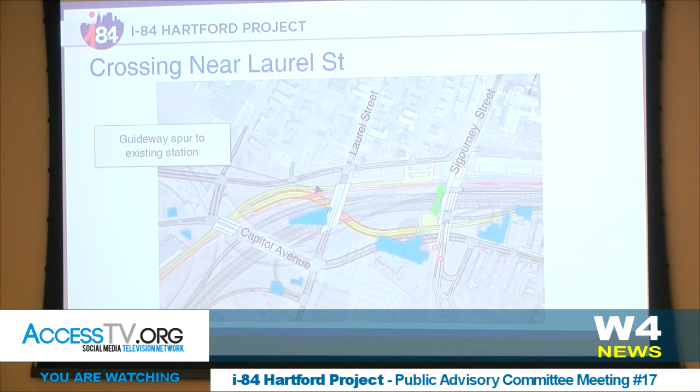We envision that these stations could function together, with vertical access up to Sigourney Street ensuring that people can move between them if they so choose. Here's another view of that.

The existing Sigourney Street station functioned under the prior concept where the guideway passes through it and continues off to the CBD, versus now this idea of having the primary guideway with a new Sigourney Street South as well as the existing station with its spur.

So I'm going to continue to shift a little bit to the east and talk about how the guideway terminates. First, I'll illustrate a couple of the different routes. The primary routes, when we think of CT Fast Track, go straight to the CBD, using the guideway the whole way.

But there are other routes that today exit the Sigourney Street station. Under this revised concept, they could use that Sigourney Street South station, circulating to downtown via Capitol Avenue and then up Main Street. The other family of routes would use that guideway spur to the existing Sigourney Street station, go up Sigourney, and use Farmington to enter downtown and head to the CBD. So those would still function in those manners.

Now I'll talk about a couple of different ways we envision terminating the actual guideway and how the routes could function under those scenarios — bringing the guideway a little further to the east for these routes that focus on the CBD. So we'll zoom in here a bit on the existing layout just to orient everyone.

We've illustrated the busway here in yellow. The guideway passes beneath I-84 today, beneath Broad Street, curves around here with the railroad, and then merges with those I-84 on and off ramps.

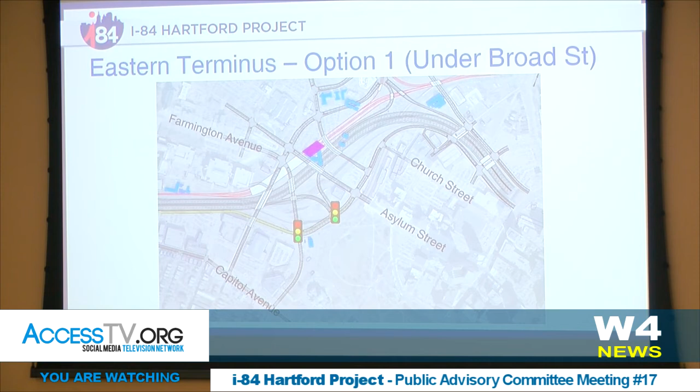So one option we've developed would take the guideway and pass it under Broad Street and then hook up with our new Bushnell Park West. We'd still have those Capitol Avenue routes and still have the Farmington routes. With the Farmington extension, we're envisioning they would use Asylum Place and then continue down Asylum — those could be well served as the primary routes that stop right at that rail station.

As we think about the guideway itself, it would come through here. I want to point out we're continuing to evaluate the potential impacts to the current infrastructure. We aren't actually pushing anything closer to it than we've illustrated previously, but there is still some concern about potential impacts to parking spaces that we'll continue to evaluate as a team moving forward. It would pass underneath Broad Street and then intersect and terminate at the Farmington Extension and that Road A, Bushnell Park West.

Under this scenario, we would not be able to provide that Road B we've talked about as a local street — this would be dedicated to the busway. So the routes would come to that intersection, leave the dedicated guideway, follow up Bushnell Park West, and turn right at Asylum to circulate the central business district as they do today. So that's one option.

Option two would bring the guideway up to intersect with Broad Street. We'd still have the Capitol routes and still have the Farmington routes, which would likely be the primary access to the rail station. But our guideway would terminate at an at-grade intersection with Broad Street, and then use that Road B as a new local street. The buses would use that, then turn left and come up Bushnell Park West, circling the CBD as they do today.

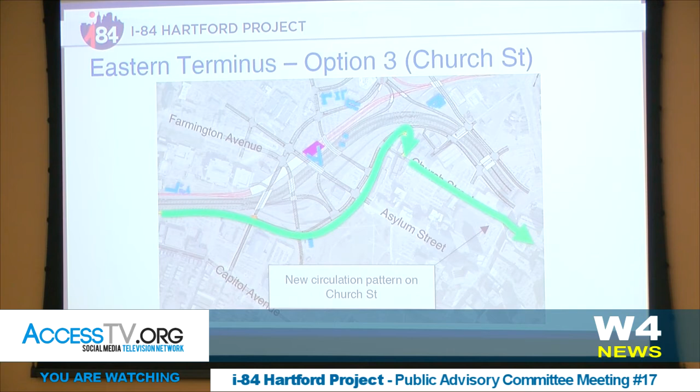In addition to some of those changes, we're also considering the potential cost implications of needing to rehabilitate that rail viaduct. There are some estimates out there that range from 50 to 100 million in terms of cost. Right now that's a facility owned and maintained by Amtrak, so it's something the DOT would have to take on. It's certainly something we're cognizant of and continuing to evaluate here as we move forward.

So, essentially we feel like we've hit on this idea of a new crossing location near Laurel Street. It's less expensive than the prior concept, and would allow the busway to remain in operation during the majority of construction. We're going to continue to analyze and look at how those Sigourney Street stations would function, as well as how we terminate the guideway.

Ultimately, we're looking to document a preferred alignment, which could be part of that level 3 screening process that we've talked about. So you don't have to listen to me anymore. I'm going to have Christine come up.

I know we've had a full meeting, so I'll be as brief as I can, but I just wanted to give you an update on where we are with the environmental impact statement. As most of you know, we are pretty well into developing the DEIS.

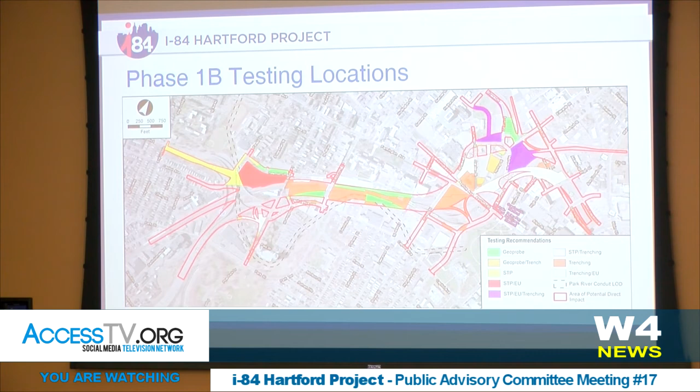This is just an illustration showing through the corridor where we're going to be doing the various types of archaeological investigation. And these findings, the results that come out of this investigation, will all be included in the draft environmental impact statement. In terms of the air quality technical report, that was done in January.

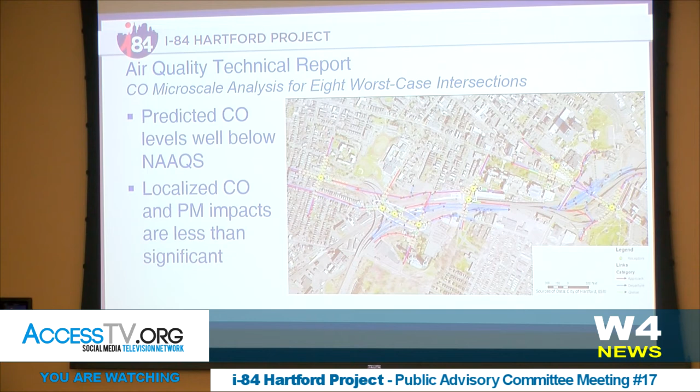Some of you have probably had a chance to look at that. We did a carbon monoxide microscale analysis, which looked at 8 worst-case intersections in the study area to determine whether or not emissions exceeded national air quality standards, and there were no exceedances of national air quality standards for future build conditions. We also did a mobile source air toxics analysis, which looks at 9 different air toxics and how the emissions will affect those 9 toxics.

And what we found is if you look at 2040 build conditions compared to existing conditions, there's a 70 to 99% reduction in emissions depending on whatever pollutant we're talking about. Similarly, if you compare 2040 build conditions to 2040 no build conditions, there's a 9 to 18% reduction in emissions.

And the reason we're seeing this reduction in emissions is because you've got improved level of service, reduced congestion, reduced vehicle miles traveled, and cleaner burning vehicles. In terms of temporary impacts, there are going to be temporary air quality impacts during construction, and you'll see a qualitative discussion of that in the technical report.

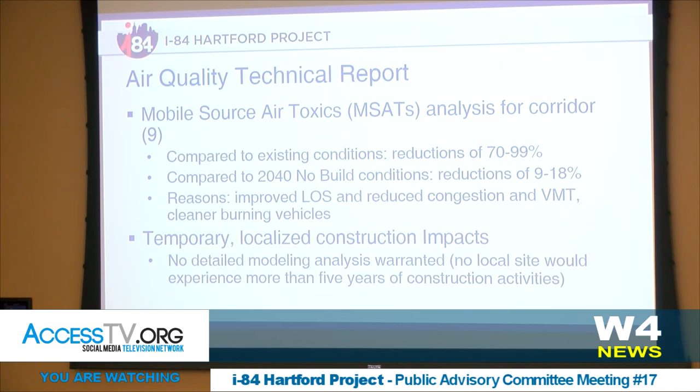The noise and vibration technical report looked at the noise generated from the highway using FHWA's traffic noise model. We also looked at noise and vibration from the rail component based on FTA's noise and vibration guidelines.

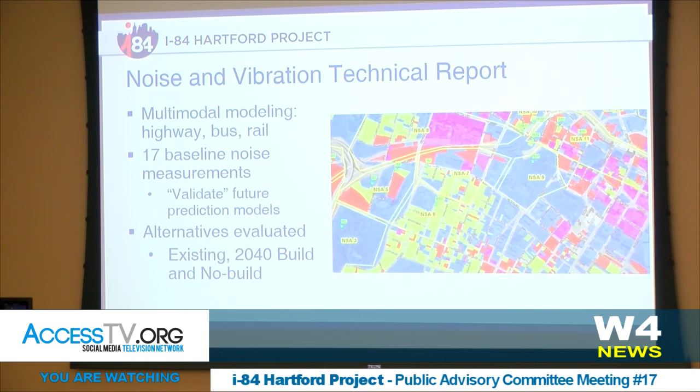We looked at 17 baseline noise measurement areas, which you can see here outlined in yellow on this map. We actually did monitoring in those locations so that we could validate the future prediction models. And we evaluated existing conditions, 2040 build and 2040 no build conditions.

And what we found basically with the lowered alternative is that lowering the highway, and especially in those areas where it's depressed or slightly depressed, the cut acts as a shield, a noise shield to the sensitive receptors nearby.

The highway and the local streets are generating most of the noise out there, and basically we evaluated that, again, based on the traffic noise model. We identified locations where we analyzed noise barriers and the effect of noise barriers. We had to look at Connecticut DOT's feasible and reasonable criteria to determine whether or not they were warranted, and we came up with a recommendation that out of those 10, one noise barrier was deemed reasonable and feasible.

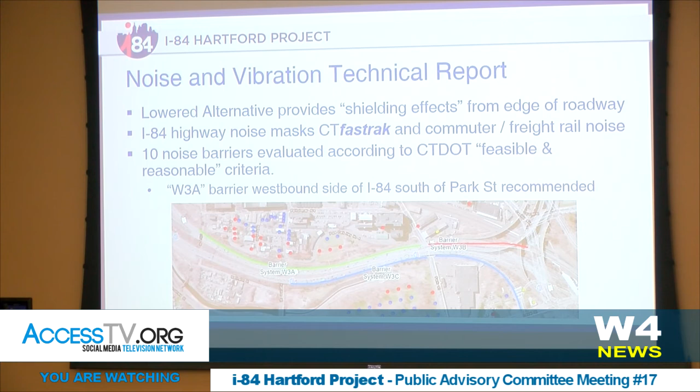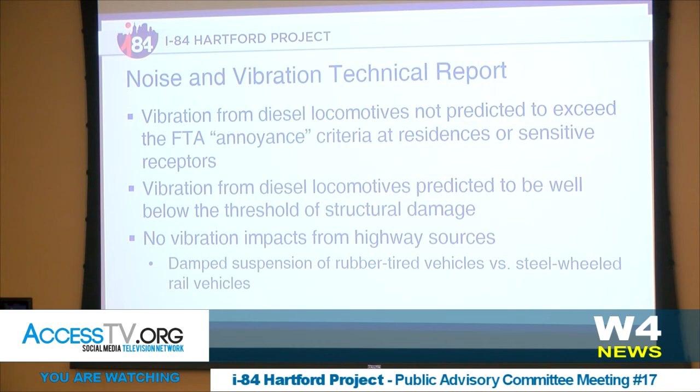In terms of vibration, particularly due to the slow speed of the trains running through the area, there are really no vibration-related impacts. The vibration from diesel locomotives is not predicted to exceed the FTA annoyance level, and similarly, it doesn't exceed the threshold for structural damage.

Land use and socioeconomic technical report. Again, this hasn't been seen by anybody yet. We're going to be submitting that to DOT early April for their review. But this basically looks at the affected environment, the impacts and the mitigation to the community resources, demographics, environmental justice populations.

And I think one of the takeaways and one of the points of interest in that document is it's going to identify the residential and commercial displacements generated by the project, and it's going to include a relocation plan that's going to identify potential areas for relocation housing and how we're going to handle that, because there are quite a few residential impacts where people are going to be displaced. So that's a document where you're going to see the preliminary findings of how that's going to work out.

In terms of the overall DEIS schedule, about early 2019 is when you folks will be seeing the draft environmental impact statement. Around this time next year, we'll be having a public hearing on the DEIS, and then we'll be gearing up for our final EIS and our record of decision in the summer of 2020.

So I know that was a lot of information in a little bit of time, but any questions?

The relocation that you're talking about, is that to existing housing or the creation of new housing? That is identifying the existing housing that is going to be displaced and how we might relocate them and where we might relocate them. It is a plan to replace the housing that's being taken down, yes. Building new housing, we don't know yet, but it'll be in the plan. DOT has taken the lead on that relocation plan, and it's looking at existing available housing in the area, but it also may look at other modes such as reconstruction, new housing.